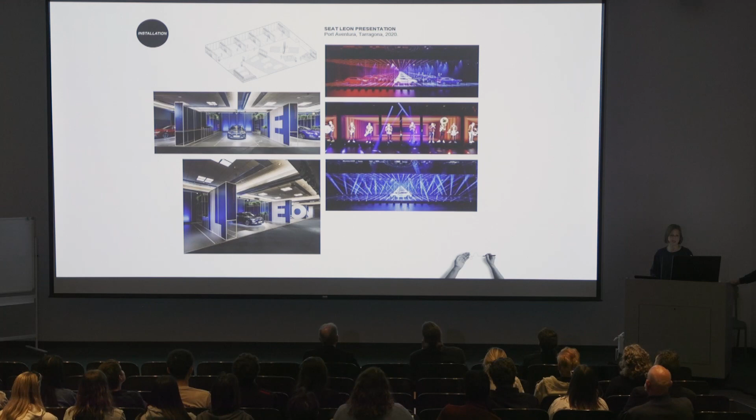The question is whether these quick projects are quick—the thinking process is not always quick, but the construction and dismantling is very fast. Sometimes it's only for 24 hours, or for 1 or 2 weeks. But we find that in architecture, which is such long-term, serious work dealing with so much money and resources, human or material, we really enjoy quick projects because they are the few moments we can really test things in a less serious, less compromised way.

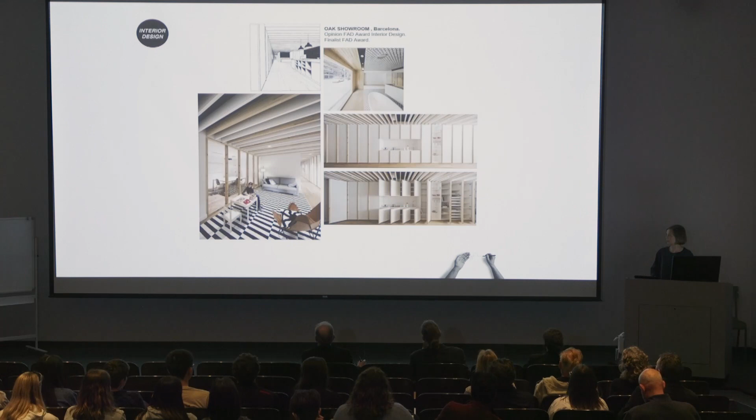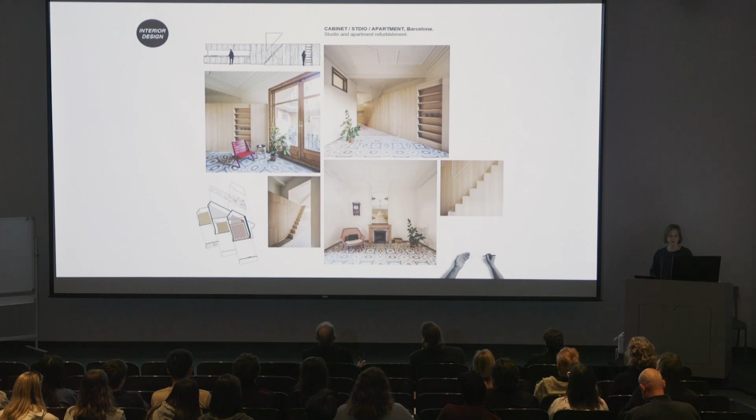In that way, interior projects also help us work on a small scale, which obliges us to think of the project from inside, and to deal with detail—the last layer of architecture, the one we actually live with, touch, and sleep on.

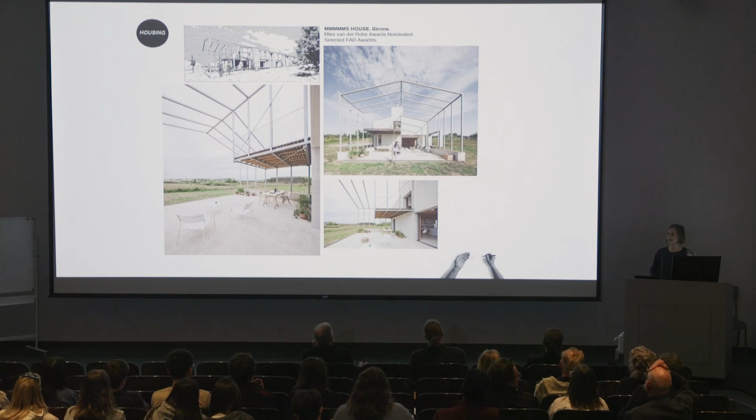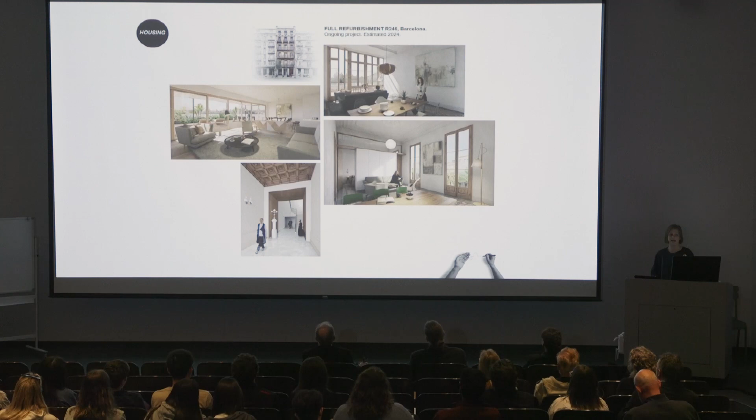Small projects are often frustrating economically and time-wise, with the implication of a private client and other negative aspects, but they also teach us a lot about life. We have made housing at different scales lately, with projects that deal with heritage alongside these new layers of life.

That's how we see architecture in Europe evolving—we'll be working more and more in already built environments, whether a building, an urban area, or a larger complex. This is a public building we're working on in Barcelona: a youth center and daycare in an old building that doesn't have heritage value, but it's there, so it's incorporated into the project.

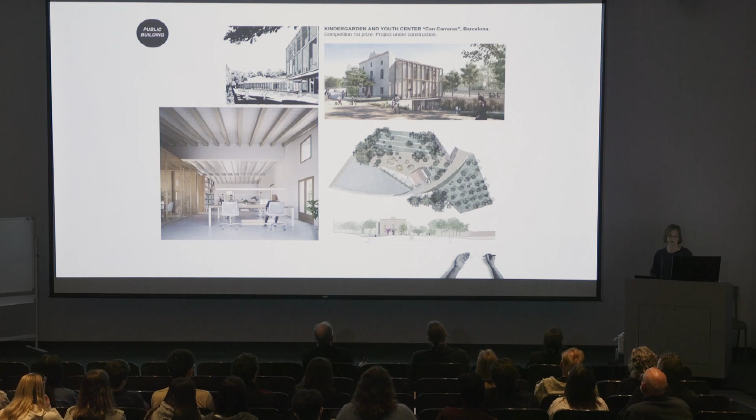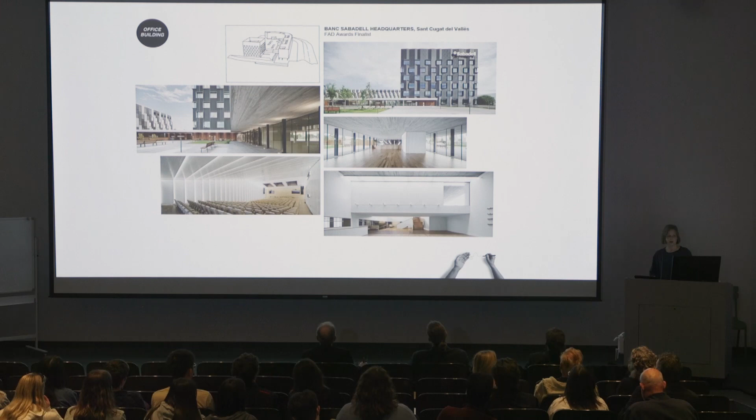Then there are other programs, like office buildings. This particular project we designed together with Eugeni's father, Jaume Bach, who is also an architect. With this, we have to deal with the change of scale and change of process. Sometimes the smallest projects are the most difficult, because you're the only design agent, whereas in big projects like this you have a whole team of people who often know more than oneself.

The difference in scale, assignments, and teams all make our professional life much more interesting, and push our responses to different projects to be out of the box. The university or different schools help us as well, and we hope we can help those institutions in turn.

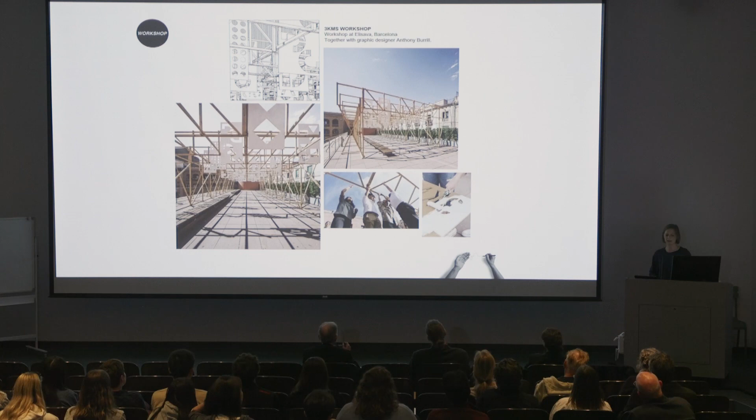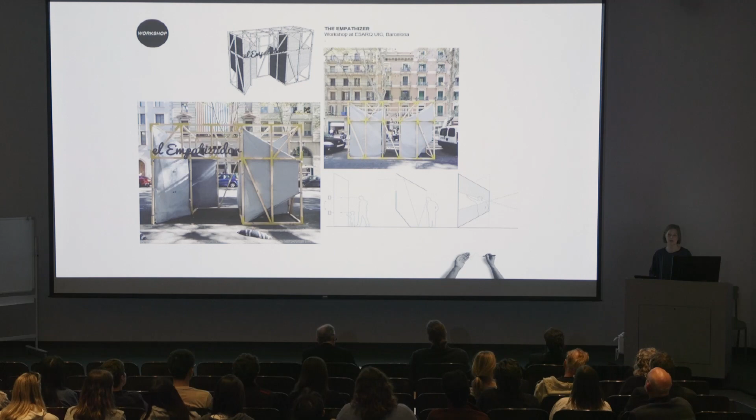We've had the chance to teach in many different schools, often with very quick workshops, dealing with a one-to-one scale, which we feel is a really important experience for students to actually see what they do. And even in our free time, sometimes we build architecture.

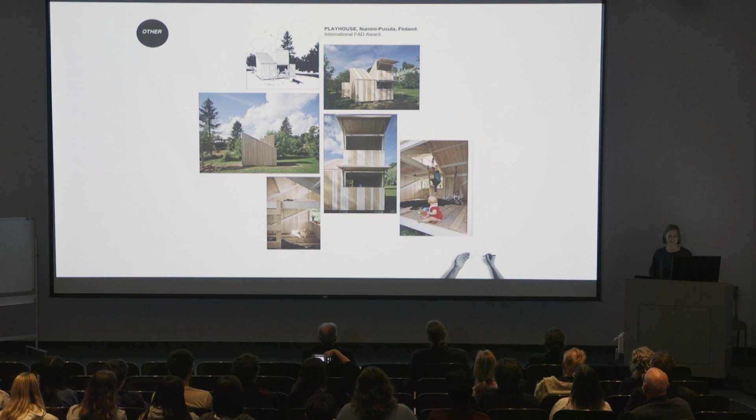This is a playhouse for our kids. It's just a sign of enjoying architecture, or thinking on space at all levels, even being ready to spend your summer vacations on that.

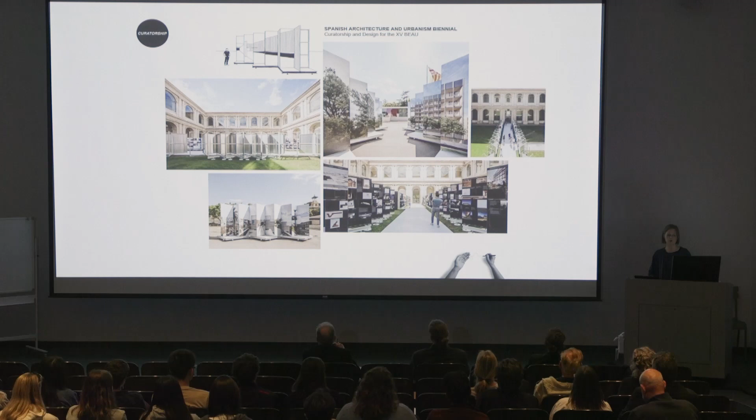As Monica mentioned, we have been the curators of the latest Spanish Biennial—there's a new team that started a couple of weeks ago. It was an interesting project, both content-wise, reviewing the best architecture in Spain from the last 2-3 years, and in exhibiting it and trying to communicate the values of architecture to society as a whole.

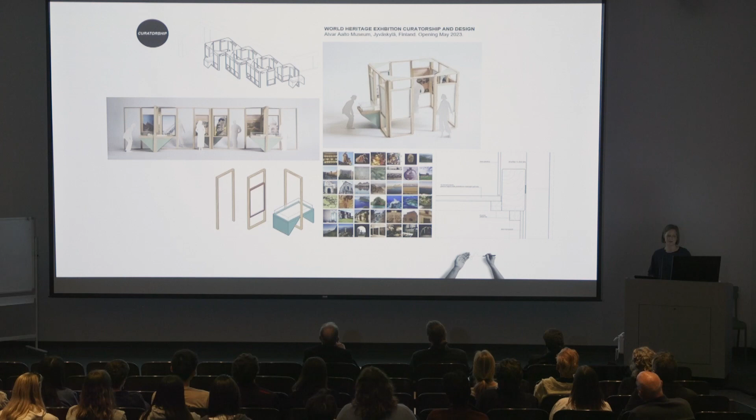We have one slide of the exhibition we are working on at the Alvar Aalto Museum in Jyväskylä, Finland, which will open at the end of May.

So after this quick introduction to the different interests and work of the studio, Eugenie will talk about the concepts or words we try to invent to somehow describe the interests of our work.

Okay, it's working. Could we dim the light a little bit more? I want you to see the images and not me, actually. Okay—the pointer, you have to point here. Sorry? That you have to point here. No, I can do it like this. Ah, okay, but the change.

Elective affinities—these words: multiplicity, imperfection, materiality, the unexpected little twist, and life and time. They are somehow the words we have on the table always when we're working.

Always in our discussions, there come these words that come from different backgrounds and different elective affinities. This comes from the Goethe book, but the unexpected little twist is a term that comes from a movie by Billy Wilder, where suddenly there is the structure of the movie, and then there's a cut, and one of the characters says, my friend, you think this is what will happen because the structure is so clear. But now comes the unexpected little twist that changes everything, and suddenly the story goes in another direction. These are concepts that we like to bring into our architecture.

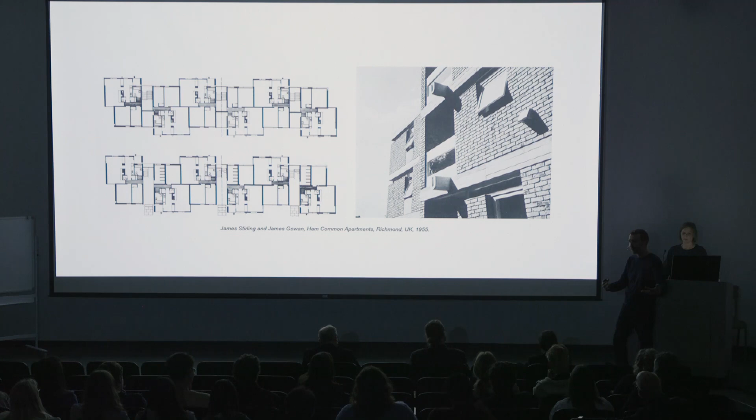Gehry, in a very spectacular way, or the first Gehry, actually works very much like that. But also we can find that without needing to do very showing-off buildings. For example, the St. Hilda by the Smithsons is doing that in a very short width of the facade.

The users are the last layer that completes the building, which actually, working in this way, we are generating open systems that allow life to happen in a very, let's say, common sense way.

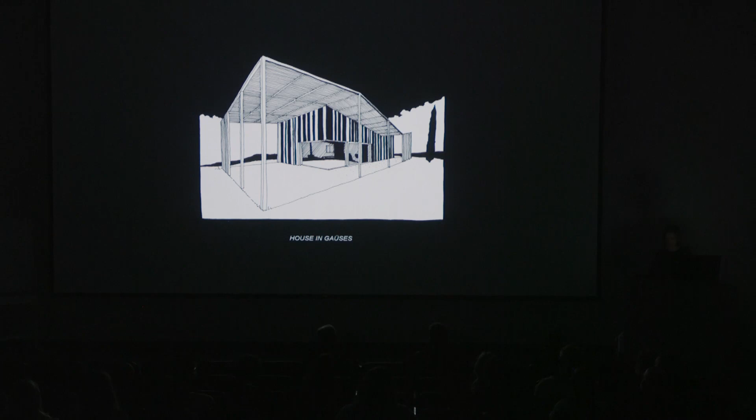Well, now to show how this works in architecture, or in our architecture, we'll show something like 4 projects. I'll start with a very early project of the studio, a small single-family house, actually a weekend house, so it's kind of even smaller than what a one-family building would be.

In the north of Catalonia, 1.5 hours from Barcelona to the north, in a rural area, in a very, very small village where there are no services at all, just typically a church and some houses and some sheep.

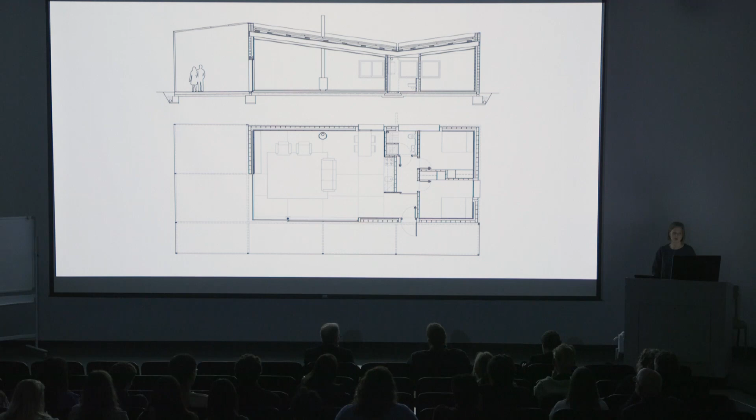As it's one of the very early works, we are working with very limited resources, and we just know that the most economical way to deal with this program is to do a box, like a shoe box. But then how to get something out of this shoe box, how to make it contextual, how to create interesting spaces that you would enjoy, especially in the hot season.

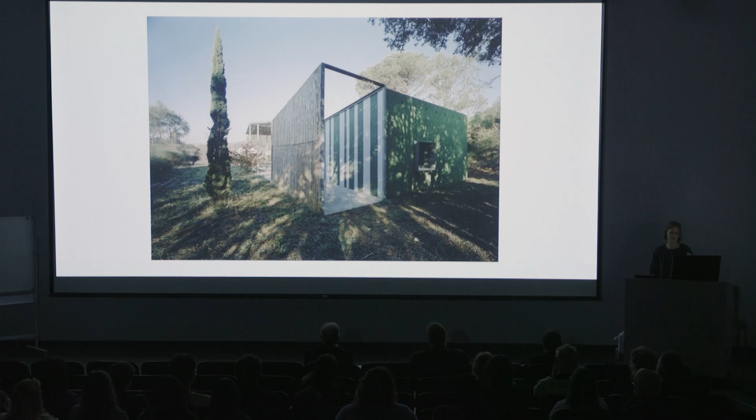So we make a shoebox with a porch, also thinking that this porch will be maybe 1/10 of the cost per square meter compared to inside the house.

It's made in a very traditional way, just bearing walls, only with the exception of the corner, which has a little bit more sophisticated solution. But what I want to comment on today is the stripes, which is kind of the striking feature, maybe.

The stripes are not here to be striking. They are actually here to make the building lighter and more related to the greenery around it. But it also has a very pragmatic reason to be there.

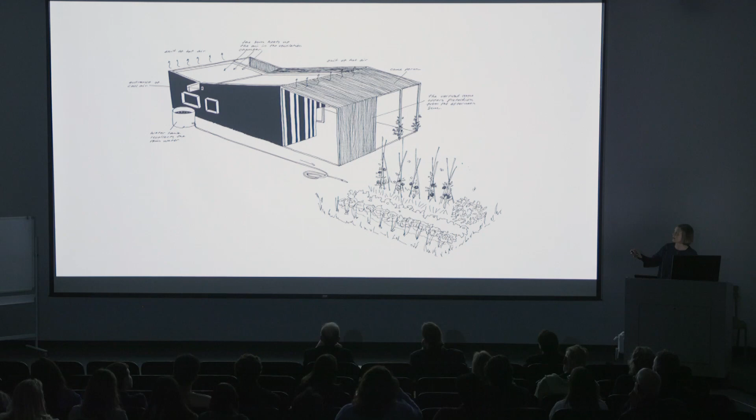Otherwise, the house, the shoebox in itself has an inwards tilted roof to collect the rainwater. It has a double layer roofing so that we get a natural heat insulation, natural ventilation inside the roof form, also helped by the slope in the ceiling. So we have some holes here in the lower part of the roof that suck the cool air in, and then as the ceiling or the roof gets heated, it makes a constant circulation of cooler air.

So basically, in this case of the house, it is to think on the very few resources that we have, to use them in an intelligent way, and to apply this graphic pattern so that it somehow relates us to the greenery around the Mediterranean forest that we have around the house, and also has this play with the shadow of the cane porch.

Okay, this is a very different project because this is in Barcelona, in a neighborhood called Horta. And Horta is a very special neighborhood because it has a structure, well, it used to be a village, like many neighborhoods in Barcelona that originally were villages until Barcelona grew and ate them, okay?

But Horta has a special character, and when we got the commission to do a house in a plot that was empty here, we thought, okay, how do you do a house in this neighborhood when you are from the neighborhood, and you are not like an alien that came from somewhere else? So the first thing we do is, okay, let's see what's the language of Horta. Let's see how all the houses in Horta are, what are the common features, okay?

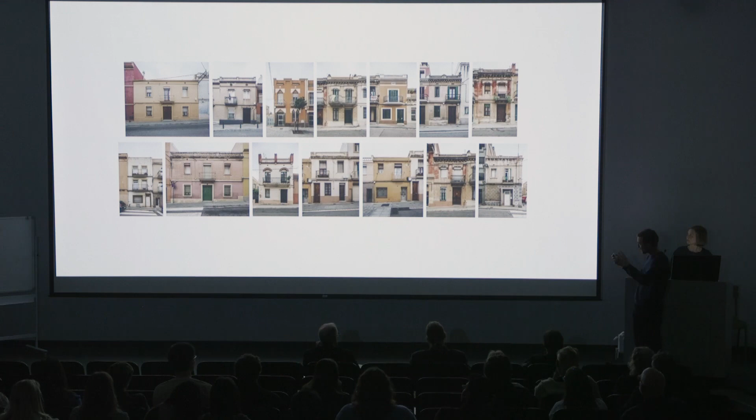And as you can see here, they are basically one or two floors, two or three - it's just that in Spanish we say it differently. Okay, two or three floors, vertical windows or balconies, shades, use of color - though it has been lost because many of the houses are old, but there was a lot of color in Horta. So we take all those ingredients and we draw the elevation of the street, and this is our plot, okay?

And we detect that actually everybody from different times is following the rules of being a good neighbor, of following those Horta rules, except one that we have just next to us. You will see. The rules are a wall facing the street, aligned to the street, a plinth down, sometimes small, sometimes bigger, vertical windows, balconies, and blinds, okay?

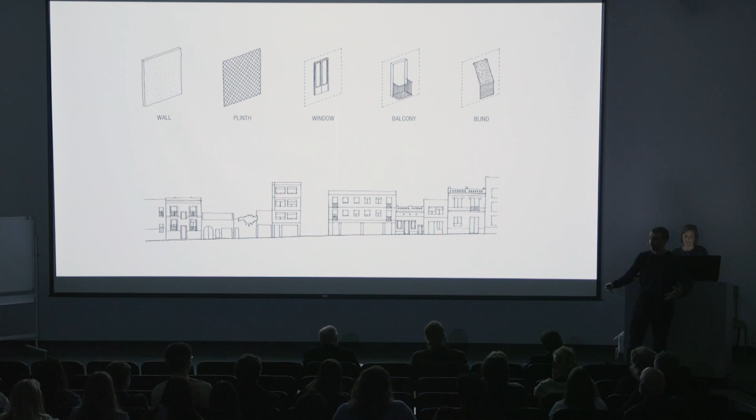These are the ingredients that we say, okay, if that's the language of Horta, let's speak that language. And that's what we do. But we have this neighbor - let's see if this works.

Yeah, we have this neighbor on our left who is doing absolutely everything to ruin that piece of the street, okay? Because the windows are square, they are not vertical, there are no balconies, there is no plinth, it's not aligned to the street. It's not following anything of the rules of the street. And of course, we have to build a project here, and we could just let it be and say, okay, it's not our business. Let's forget about it and let's just do our project.

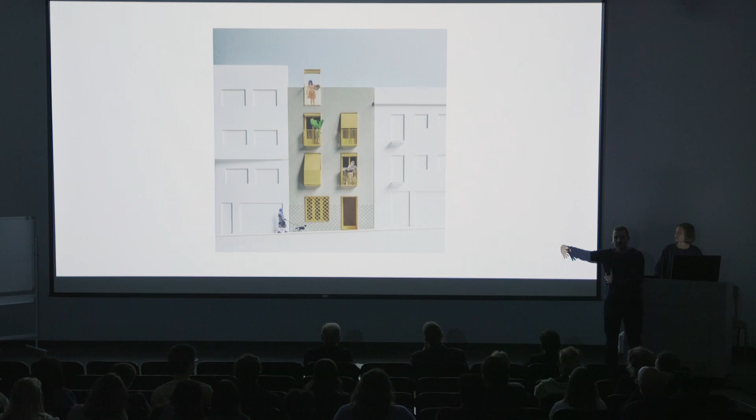But we somehow wanted to redeem this neighbor who was behaving so badly, okay? It was like, come on, what can we do from our side without touching it? How can we do it to somehow embrace it and say, hey, you're one of us again, don't worry, okay? And to do that, well, it's obvious, no?

We just do this balcony. This balcony that seems like a lost balcony - actually it's the most generous balcony of all, because it is there to give some privacy in the terrace. Yes, you will see it later, okay.

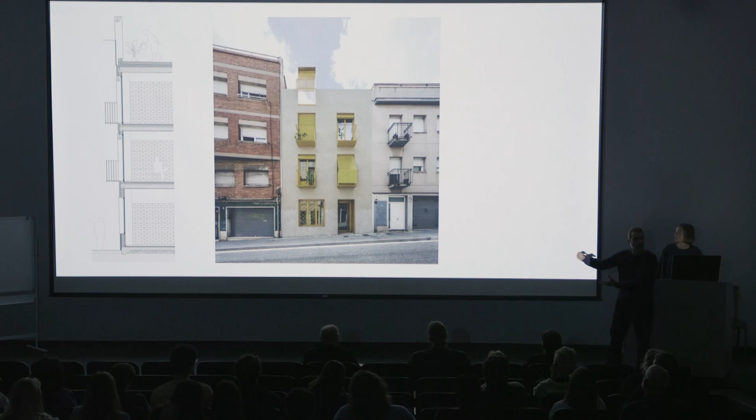But basically it is because, like this, our building uses some kind of a joint where the wall aligns with this one here, and the balcony somehow is taking that one there. So it's a way to say that, okay, come back, we pardon you, no? We pardon you, okay? And you can be, again, part of the street, okay?

And then it's just a question of those ingredients, those words that we use for talking this language, the language of Horta, just to work with them, okay? With some details, like the joints of the plinth - they follow the lines that, in the ground floor, are there just for protection. Very light balconies, the blinds. Sorry, but sometimes this doesn't pass, and that's why, okay.

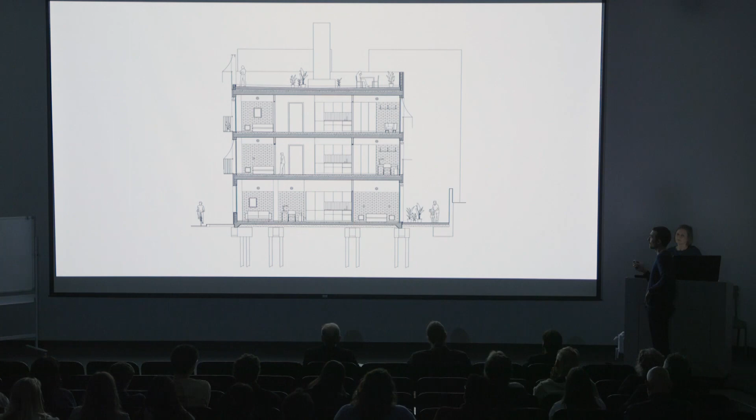And then the program is very simple because it's just 3 apartments, very small, extremely small apartments, actually as small as the regulations allow, because the plot was actually smaller than what it should be. So we had to look for many ways to be able to fit those apartments in a good way.

You can see that the ground floor has a small patio here, and these two, they will use, you will see it later, the terraces up there.

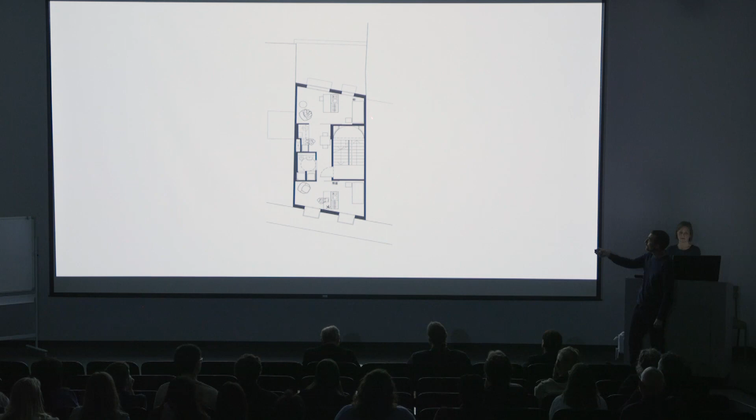This is the main entrance, the studio apartment on the ground floor with the patio, and then what we did is unify all the kitchen, toilet, and stair in the middle, and have 2 equal spaces, these trapezoids here, that are the same, so that allows you to choose if you want this to be the living room and this the bedroom, or vice versa, or if you want to share the apartment with students who rent the apartment, they can each have the same space.

And then on the terrace, what we do is exactly the same. There is a common area with the installations, and then 1 terrace for one of the floors, 1 terrace for the other apartment, and the patio down for the 3rd one.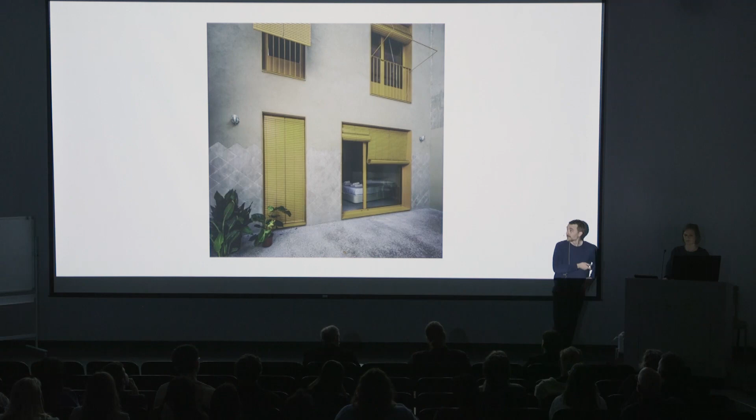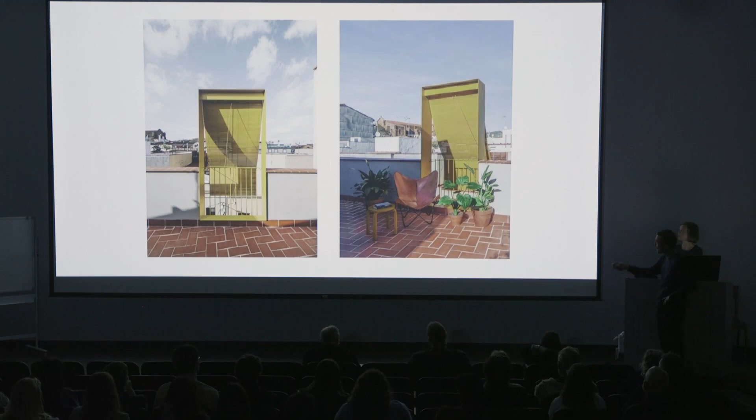And then the rest is a question of minimizing many things. I mean, minimizing where we clad so that we have the installations, but not where we don't need to, having the stair ventilated, the space up here so that you can have some privacy and spy on your neighbors from up there.

View from up, then this unifying color. The color actually comes from a building that is just in front of ours, a little bit more down the street. And then just controlling some small details, very simple.

I mean, sometimes we say that our details are no details. It's so simple that actually the detail is that there is no detail, that the detail doesn't exist.

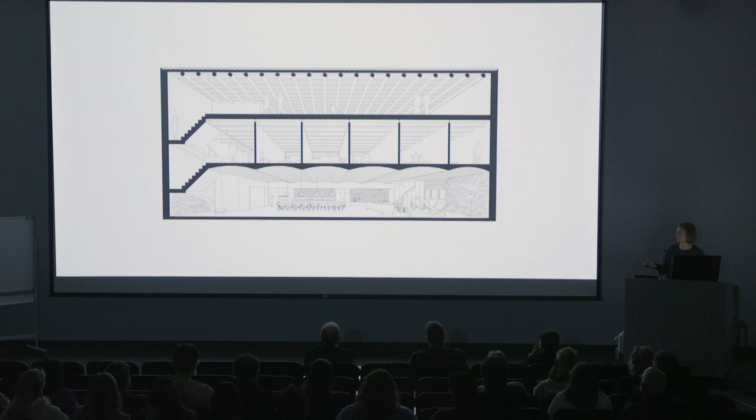So that was something that we wanted to keep in the project. Anyway, then we had a use that we had to make into small pieces, especially on the middle floor.

What we do is really try to respect the rhythm of the building. So even though we break the middle floor into these smaller spaces, which would be the bedrooms, the more conventional bedrooms, the more visitor-like bedrooms, we would always respect the structure. So somehow even the program, the number of rooms, would come dictated by the structure.

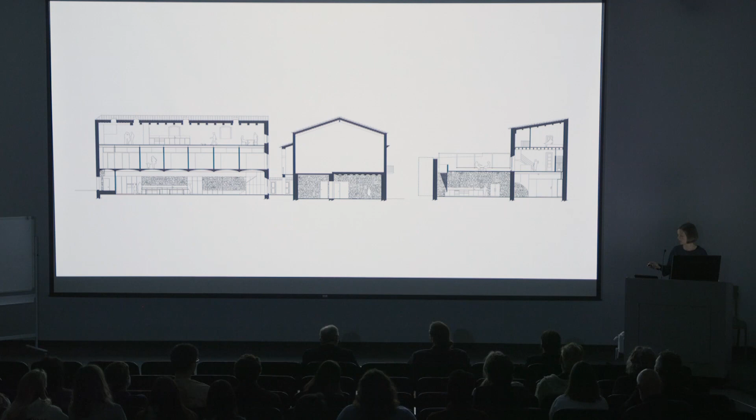Another decision that we make is that the building itself has a certain rough beauty, and we try to keep that and be very economical in our gestures. So actually we use green paint and some very light structures, green shades.

In the exterior, everything that has been somehow modified is green, but as you see, there are very few things in the whole project. And in the interior, we have to give this new equipment like kitchens and bathrooms and so on, but they're very small interventions in the old, rough, and in itself beautiful space.

We do a second staircase. There already was one, as you can see. It's quite, how would I say, not very adapted to any kind of hip problems or moving objects up and down.

But still, we thought that it was part of the industrial history of the building, and also it gives us flexibility of use that I will explain you now.

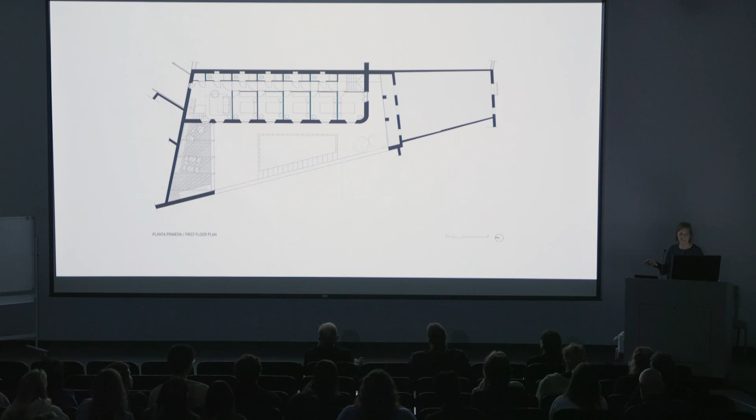The thing is that the house is of a couple. They would be 50, 55, almost 60 years old, and they would have all these kids and friends and people visiting them, and they would like to be able to divide the house in various ways.

So we can understand the whole building as one big family home with plenty of bedrooms in the middle floor, but also another bedroom upstairs with a kitchen and a living room. Here also some living area, the 24-seated table with a kitchen, and having one staircase here, another one there, and an entrance here.

If we think that there is a couple visiting, the visitors could enter from this entrance staircase, occupy this small living room and the whole big area here. Or they could have another room and end up adding more and more. Anyway, this staircase would allow these bedrooms to be used for the downstairs flat.

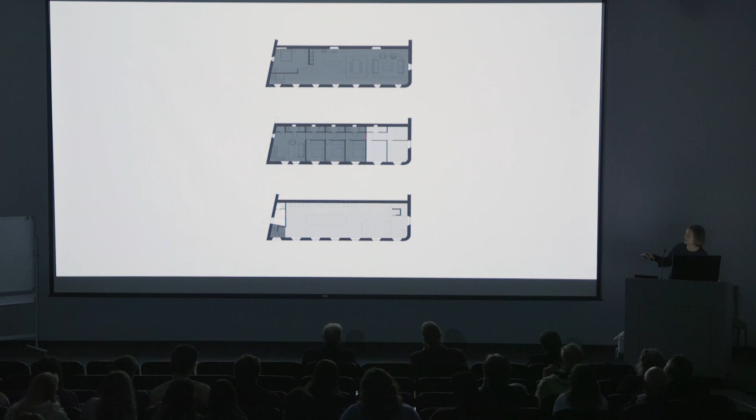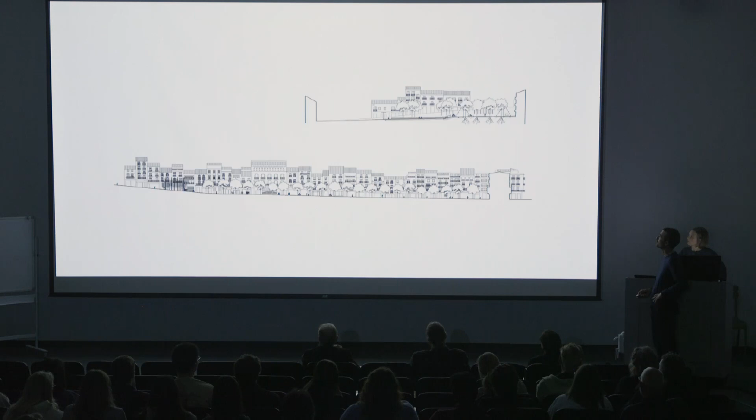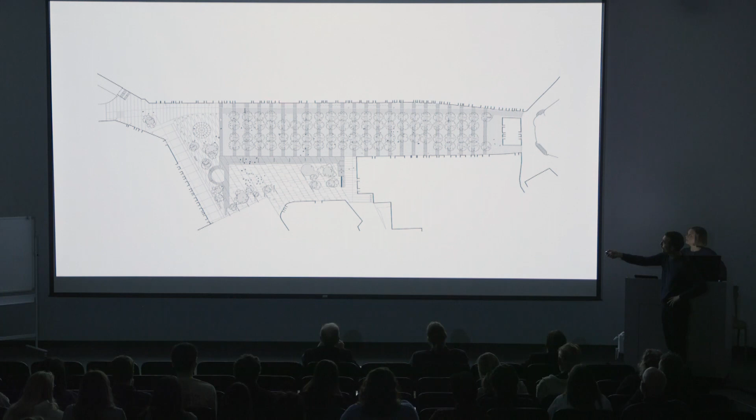This is the elevation of our project, actually. Even if it's an exterior place, it has an elevation. And this is how we mark it, because if you check this plan, this boulevard is flanked on this side by all this housing, and on the south by this housing here, but suddenly it's open.

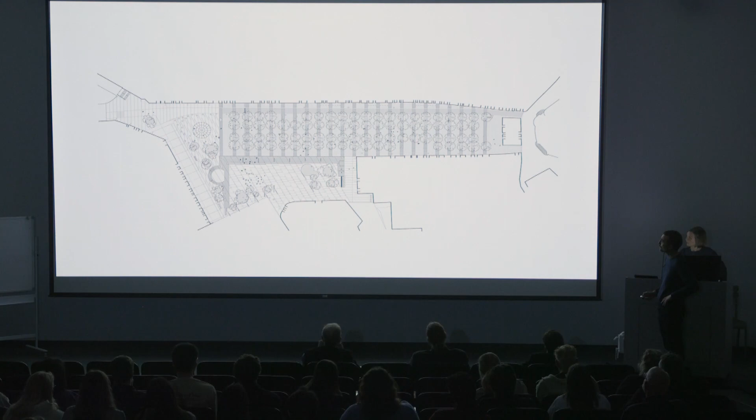And what we do to control that geometry is that we put this structure here that is actually a light that divides both spaces, so you have the idea that the boulevard is all continuous, even if in that part there are no houses, and you control also the space of the square. So this is the end of the boulevard that ends in this structure, which I will now explain.

So the pavement of the main boulevard is with granite, with rectangular pieces set in a very geometrical way. And of course, when you are working in an area that is more uneven, what we did is work with concrete, playing with those 2 geometries.

And then in these areas where there is no direction, how do you do the holes for the trees? There, it's clear they are like rectangulars in this direction, taking two trees. But in here, as there is no position, the best geometry is the round shape.

Okay, and here you see the 2 directions, that we make more visible by placing these stones, that they are basalt stones, because Olot is a volcanic area and has a lot of basalt. So the small grain of the concrete is also basalt, so it has this stone, and then we place these stones that show this complexity of the two geometries.

And then at the end of the boulevard, there is this structure that they actually asked us for a fountain. They wanted a fountain at the very end of the boulevard, in the axis of your view. But they specified that the fountain had to be off most of the time, like maybe 90% of the time.

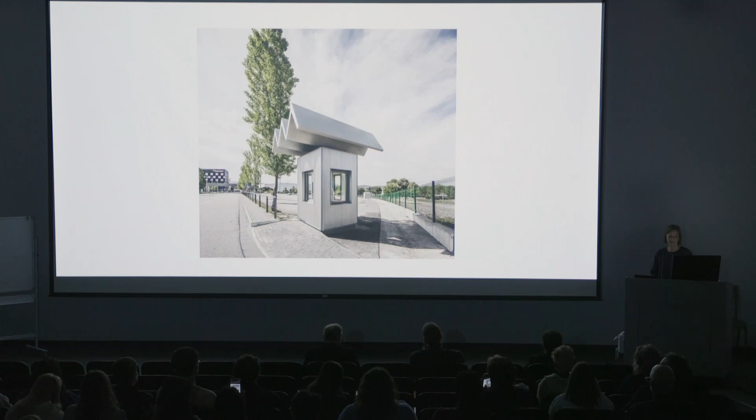Like how do you hold this hat in a way that you don't show how it's attached, or how to make it a little bit airy so the air literally runs through it, how to use the material in a very precise way so that it almost becomes like a textile, like some kind of pleated detail.

And now this will be our last project, so we will all come to a happy end at some point. Okay, this is the installation that Monica talked about earlier.

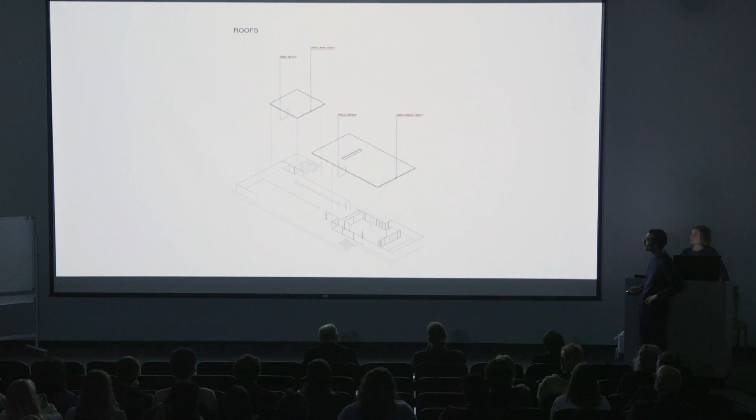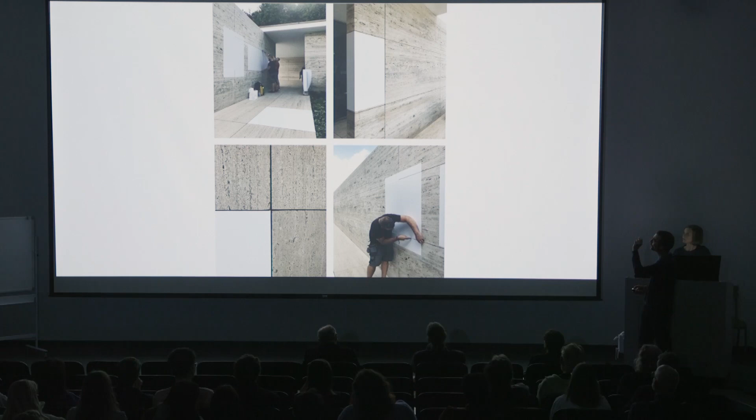It's an installation that we did in the Barcelona pavilion, that you all know. And what we did was basically dematerialize, to change or erase the materiality of the pavilion, which is one of its main features. To do so, we studied all the surfaces, and chose the right material: a glued vinyl sheet that wouldn't leave any trace after our installation. It has almost no depth, so it doesn't change the shape of the pavilion, and we placed it so that all the joints are respected. You will see why that was so important.

During 5 days, there were these guys who are professionals at doing this in big supermarkets and big railway stations, usually not with white but with ads, but it's the same technique. They worked for 5-6 days, placing it very carefully following our clear instructions on how to cover the whole pavilion.

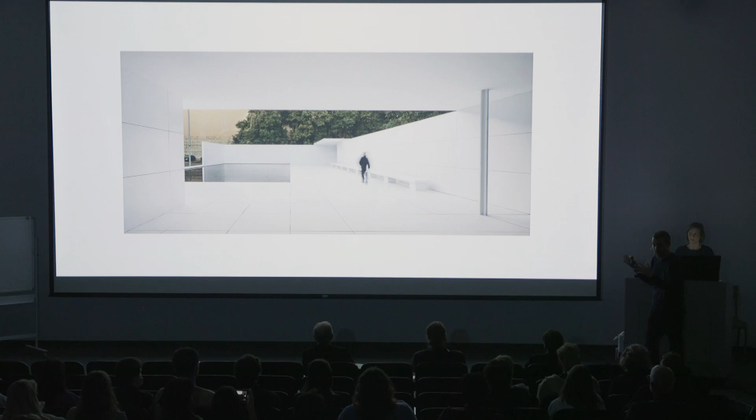And after those days, what we got was something as perverse as this, because it is perverse. When you know the pavilion, when you love the pavilion, suddenly seeing it like this—in one sense it's sad, but on the other hand you know it's just for some days. But the interesting thing is that it triggers a lot of reflections. Now we will share some of the reasons why we did this.

Of course, you can say, well, you had lots of fun. Yeah, we did it for fun, but also because there is a deep understanding of the pavilion and many other things that I will now try to explain.

First of all, it was a way to show the importance of materiality in the definition of space. When we see a plan and just draw lines, we think those lines already tell everything. But actually, if that line is green marble, red onyx, or a white surface, the feeling of the space is absolutely different.

That's something Mies knew very well, and when he and Lilly Reich did the pavilion, they used all these luxurious surfaces—marbles, onyx—that were absolutely shiny, much more than the reconstructed pavilion in which we acted. And now I'll show you something you probably don't know.

In one of the few pictures—this one—it's good to remind that there are very few pictures of the original pavilion, and most of them are pictures that Mies van der Rohe and Lilly Reich orchestrated very carefully. The points of view were really carefully chosen to show the pavilion as an autonomous, independent piece of architecture, when actually its surroundings were a World Fair, which you can imagine is always full of noise.

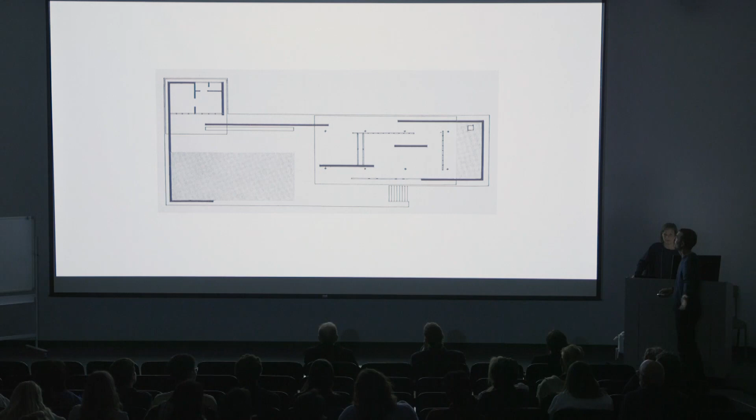Okay, the four corners, they are really in the four edges, but actually in the previous plans, this wasn't a corner. This wall didn't turn here. Some people think that at the last moment, when Mies saw what was happening in front of his pavilion, he thought, hey, we have to do something, turn the wall so we won't see it so much. This wall wasn't in many plans. But you can see there are only four corners in the pavilion, and then the eight columns placed regularly, like in the Chemical Brothers song. So this is how it looked.

There are many stories because the original pavilion from '29 was a representation of the German soul, okay? That's how it was sold. And if you see the plan, it resembles very much a house. If you study what Mies and Reich had done earlier, it was basically single-family houses, one exhibition of textiles, one block in Berlin, and the Siedlung in Stuttgart. So basically houses, and this was like the house of the German nation. So it was a building representing a nation.

The original building was made in '29, but after some months it was demolished. Then the reconstruction of the pavilion was made in '86. So when they reconstruct the pavilion, they are making a new pavilion that represents a pavilion from 1929 that represents the German soul. So we thought that by turning the pavilion into a one-to-one scale model, what we were doing is changing the building from '86 into a model that represents the building from '86, that represents the building from '29, that represents the German soul. It was like adding one more layer of representation, which can go on and on.

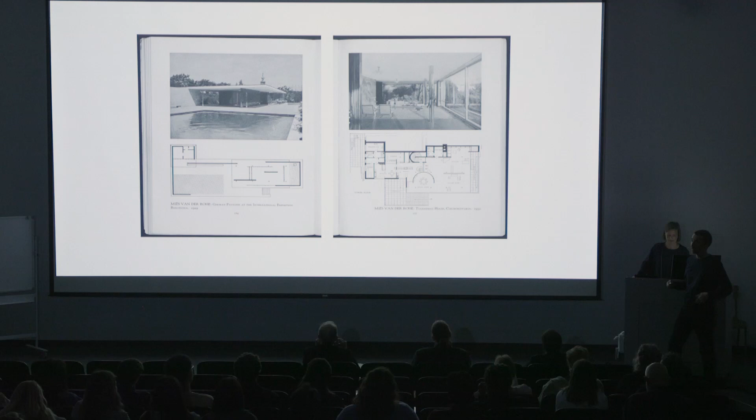So it was like a mystery, and for many architects it was a shock when they saw it built in all its splendor. So when you explain the history of architecture with black and white pictures, you can bring your message however you want. And what we did was, okay, if that's their message, let's bring it in a very radical way to the pavilion, to show that modern architecture is much more complex, much richer, much more exuberant than what the first historiography has made us believe.

Views that you never have—this photograph, you would never take of the pavilion in its natural state, because you would be all the time looking at the onyx, not looking outside.

And then an idea of this praise for imperfection. When a building is so perfect, all white, pristine, everything in its place, well, it doesn't accept use, and that's a problem. And then what happens is this: it was very nice to see how every day the joints were worse and worse, and how people were lifting up the vinyl to see if the pavilion was still there. For us that was an act of love—like, is my pavilion still there? Oh yeah, okay, and bring it back. It was really beautiful to see that.

And actually, an imperfection that Mies already had in his original pavilion—this is one of the photos that, of course, he didn't control, because you see all the roof made in a traditional way when it shouldn't be. They had to finish the pavilion very quickly, and they were running out of time. In the end, they used many traditional construction systems from the workers in Barcelona, not the ideas they were supposed to use. For example, here the travertine turns in that wall we talked about earlier, but in this area, as nobody saw it, they didn't put the travertine all the way—they stopped here. So it was imperfect, and it's beautifully imperfect: if a building is thought to be seen only from one side, like a stage, why do you need to finish it from the other side? So here it wasn't finished.

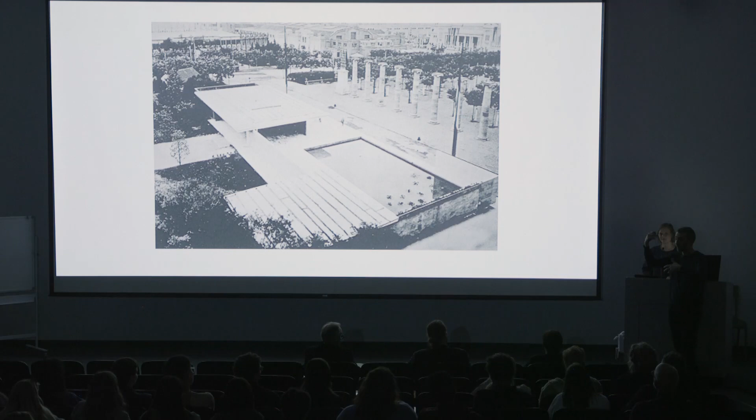Our installation, this is something nobody noticed, but we knew and enjoyed alone at home. We covered the joint with vinyl, because the reconstructed pavilion has travertine all the way, which actually, should it? Maybe it shouldn't have, because are we copying the original, or are we doing a concept of the original pavilion? That's a whole discussion. But it also has a basement and other things because it has been converted into a permanent building, not a temporary pavilion.

Then we took all the vinyls off one by one in a more performance way, collected them, piled them up, and cut the edges. The beautiful thing is that when we took the vinyl off the surfaces, the glue took all the dirt off the stone surfaces. It was like doing a peeling. The pavilion had never been so clean, and it was beautiful because we could see all the texture of the stone - exactly as if we had scanned all the surfaces of the pavilion.

And we thought, hey, we have here the whole scanned pavilion - let's put it all together and make it into one single sticky, ugly vinyl volume that contains all the surfaces of the Mies van der Rohe pavilion. So now this is another piece in the collection of the Mies van der Rohe Foundation.